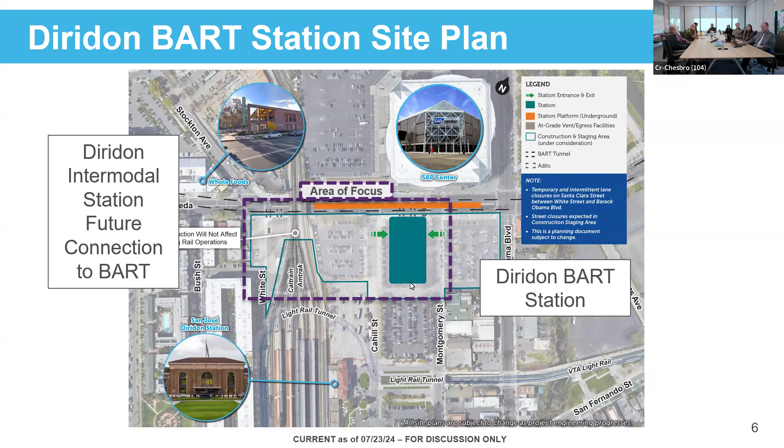At each station, I mean, at each area. So we'll talk about the 3 station configuration options, and then we'll talk about the 3 intermodal connection options. So just to keep that in mind, we'll start with the station configuration. We'll talk about the 3 different options we have there, which is underground, with the expanded footprint, and then the above ground. And then we'll talk about the connection to the future intermodal station, which will be the high-speed rail

connection. That will have the baseline, which is above ground, and then we'll talk about the connection to the primary entrance, and then a direct connection to the BART tunnel. So I just want to let you guys know those are the 6 things we'll talk about today. Considering that's what we talked about last time, are you trying to get different feedback from us? What's the goal of this?

So we do want to make sure that what we presented was understood. And I think we had some comments and questions from the last meeting that I want to make sure I address today. And if I don't address those, then I want to make sure that we have an open forum for you guys to ask questions and we give you more feedback. So we also have another poll that was sent out. It was sent out as a link. So we're not going to do the online version using your phone today.

Polls are useless. And polls might be useless, but we did send a link out. You guys can provide some open feedback and type in some things that you'd like to see. And so those are the things that we wanted to make available to the CWG members. There's an age bias in polls. We will definitely take whatever's verbally explained to us as well today and definitely note that.

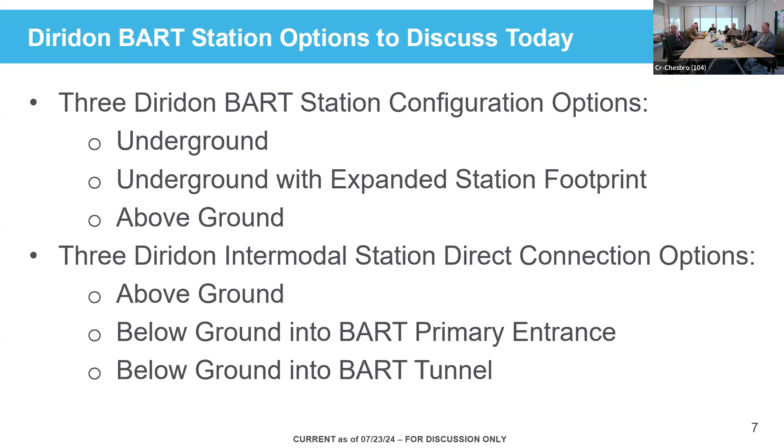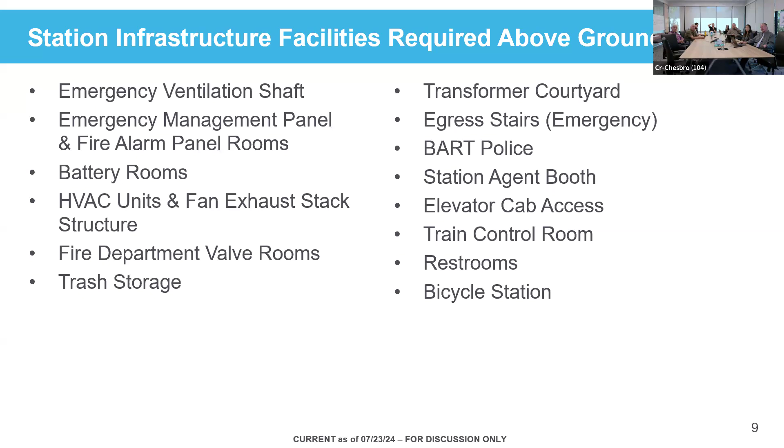Okay, sounds good. So we'll kind of go through this. I'll give you guys the presentation, and then we'll open it up for questions for anybody who might have some. And again, this is an open forum for everybody. So these are the things we talked about in terms of things that are driving some of these decisions. These are some of the things that we need to keep above grade. I just wanted to reiterate that on these options for the stations, there's certain things that do have to be above and some things we can definitely put in a basement level.

So these are the 3 options that we have. And again, we went into these graphics last time, and I want to bring up some new graphics that show a lot more detail for each of the 3 configurations. I do want to go over them quickly though. The underground scenario, which is on the left, puts about 50% of all the station infrastructure below grade. That's in the white hatch. And then we have 2 floors above. The one in the middle expands the overall station footprint and allows for a little more ground floor retail. That's the main difference between the one on the left and the one in the middle.

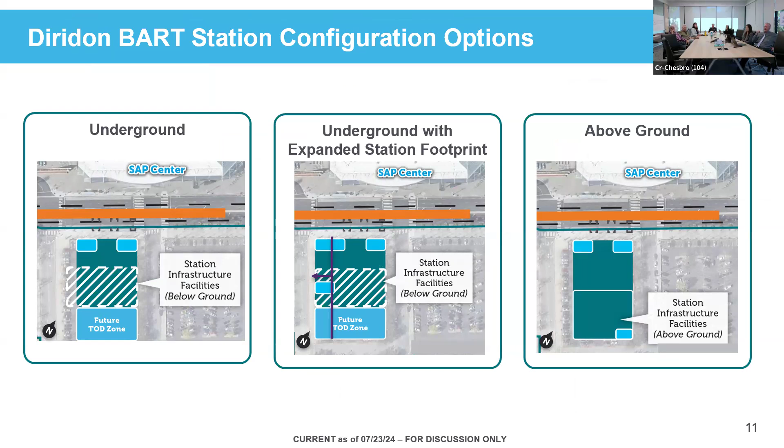And then the one on the right is just the above ground. Everything's at 1 level at grade. And then there might be a little bit more on a 2nd level above grade, but it's all essentially VTA and BART infrastructure in that area. And there's really no basement level. A quick question about everything at grade. The station infrastructure facilities, how high is that? That'd be about 20 feet, 20 to 30 feet. Like I say, I'll show you some axons which show a 3D view of those, so I can show you what those look like. Okay, thank you. Sure.

So this shows us a little more detail. This is the underground scenario. It shows some of the room layouts that we have in there. It shows the escalators and elevators and stairs that are inside of that station drum. The station drum is shown in purple. We have 2 entrances, one on the west side, one on the east side. And the main configuration change here that's different from the expanded footprint is we've got those 2 green strips along the side of the station.

And that's about a 25-foot offset from the back of the sidewalk to the frontage of the station. And that'll allow for some activation, some open space. We can put some things in there like pedestrian friendly elements. And it also allows for queuing of people entering the station after events or during crush, during peak entrance and exiting of the station area itself. So if we've got a lot of people coming in at nighttime, or a lot of people leaving the station, they can exit out and not dump directly into the sidewalk.

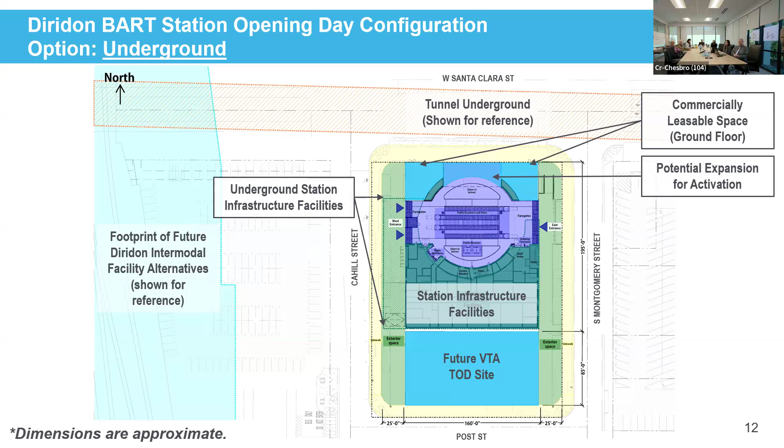We don't have a lot of parking around this station itself. And essentially, we all know this whole development around this area will kind of change how Montgomery and Cahill look. But this is essentially the day one situation. This allows for a fairly large future VTA TOD site. VTA will develop that in conjunction with a future partner, a future developer, and that will show you in the next slide.

It could be anywhere between a low rise to mid rise or a high rise building, really depending on usage and how that works. The ground floor would essentially be activated retail space or commercially leasable space around that whole perimeter. And then we also have the frontage on Santa Clara, which allows for some retail or leasable space for various vendors. So this is the kind of configuration for the underground scenario.

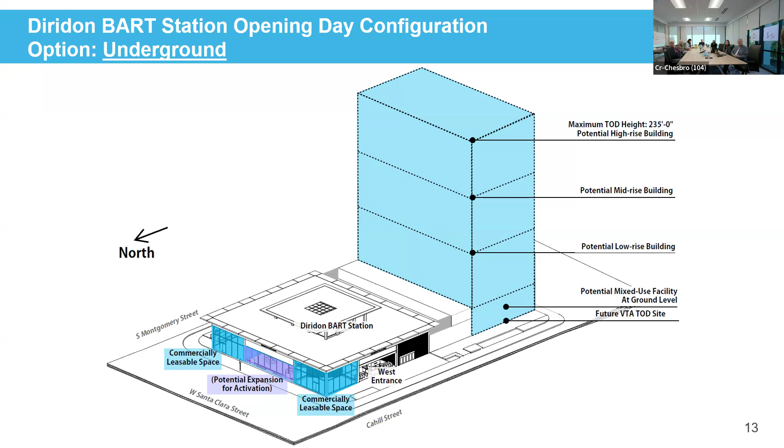We've got a lot of infrastructure below grade, and then we've got the needed infrastructure above grade behind that station, and that's shown kind of in white there. This is a cross section of the area that I'm talking about, where you've got a basement 1 level that's shown in the white hatch there, and then you've got the area above. So we've got this large station drum that goes down to the tunnel. That's essentially the same in all the scenarios.

So if the Girl Scouts or the Scouts want to sell popcorn or cookies, they have space to set up outside. Yeah, so that's kind of what these green strips do on all scenarios. We always have a green strip on Montgomery Street. We have some grading issues we've got to deal with over here. But at Cahill, this is really the change here. We've got kind of an open space. You could have vendors. You could do a lot of little different things out here.

Can I ask you a really dumb question? Horizontally, yes, I think that's horizontally. When you come down, where is the line that a passenger would come to and then enter the round circle? So right here. If you come down an elevator or an escalator, where does it stop? So if you entered the station, this is street level, right at the top of here. Then you'd come down one set of escalators down to a landing, and then a second set of escalators down to this landing. Then you'd walk over here. So there's a big box underneath which has all kinds of stuff in it. Oh yeah, we've got a lot of other stuff down in here too. That thing's about 100 feet deep.

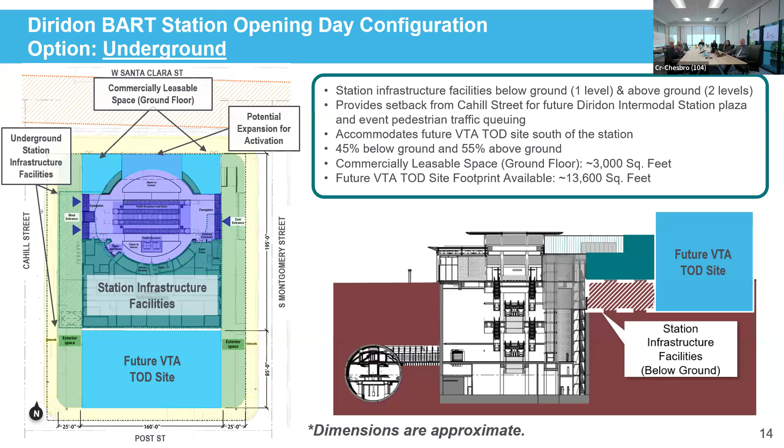So I'll just keep going to the next one, and then we can come back and talk about any of these options. Could I put something on the record? Sure. You and I talked about it, but in other high-speed rail systems around the world, you would use the space on top of that building for a high-rise building. That would be commercial, and the revenue from it would accrue to the transit agency. In fact, the Japanese Shinkansen gets 40% of its revenue from the land leases. That makes it a real moneymaker. I don't know why we don't use that space and plan to use that space for TOD.

Right now, based on the fact that you have to design that structure to BART standards, it doesn't make commercial sense based on the analysis that's been done in the market today. That's part of the VTA real estate analysis. It doesn't make sense that it works in Japan, it works in China, it works all across Europe, but it won't work in the United States. We're really losing an opportunity for 40% of the revenue that could be coming in to the system, and that's free revenue, forever. You still have to have the initial investment to build it, and right now the initial investment isn't there. But what this option does have is a pretty significant mid to high rise building right adjacent to the station.

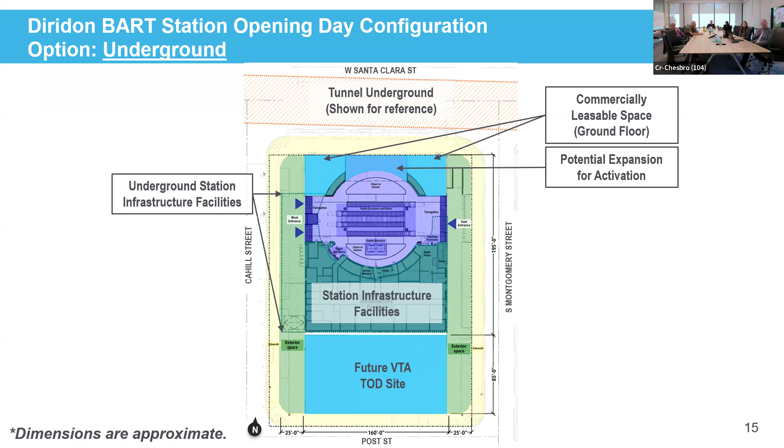I do see Charlie has his hand raised and John has his hand raised too. I'd like to just go through the next two options real quick, and then we'll answer all questions on all the options if that's okay. Just let me get through these, and maybe by the time I get through them, some of the questions will be answered.

Again, this is the expanded footprint, very similar to the previous one, except we do lose that exterior space on the left side of Cahill. We create a larger footprint of station building, and we add a little bit more commercial leasable space on the ground floor. That's the middle one back there.

That's correct. What's the margin, the width of the sidewalks? I think we're at 15 feet of sidewalk, if I'm not mistaken. So still not a tiny sidewalk, but it definitely inhibits a little bit of that queuing space and some of the things that we really miss.

This one, then we start talking about Cahill Street and how that becomes operational after the program is in place. Again, we'll have to work through that with the city of San Jose, our partners. But this does expand the actual station footprint a little bit.

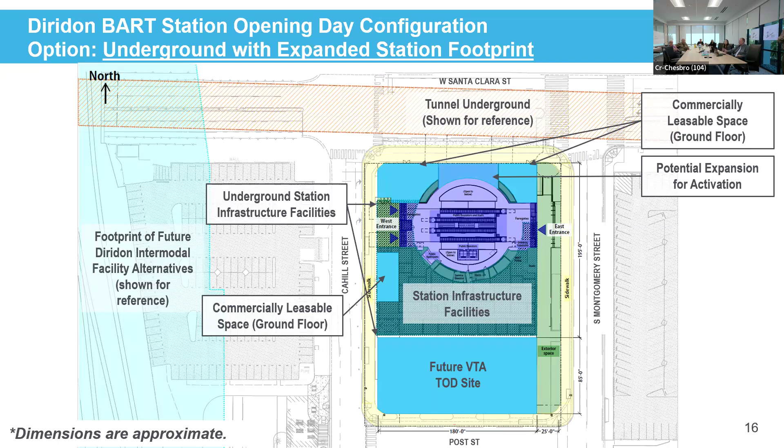The last option, and this is the cross section of that. The last option we have is the above grade scenario. Again, this essentially builds out the whole facility with VTA and BART infrastructure.

We do have an integrated bike station and locker. We do have some commercial leasable space in the corner. I do want to note that when we had the other options, we don't show a bike locker here, a bike storage locker within the station, but we will have a significant number of bike lockers out here on this site. And then when we develop this TOD site, we will integrate a bike locker storage facility there. So there definitely will be a lot of bike parking. We have to have that as part of our commitments to the program. So I do want to reiterate that because that is a difference.

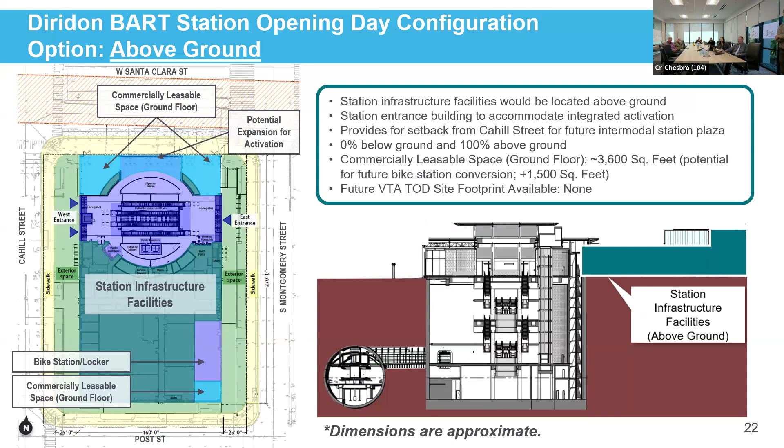So those are the three options. Now we can open it up to questions before we get into the next phase of the program. Maybe, Charlie, I think Charlie raised his hand first.

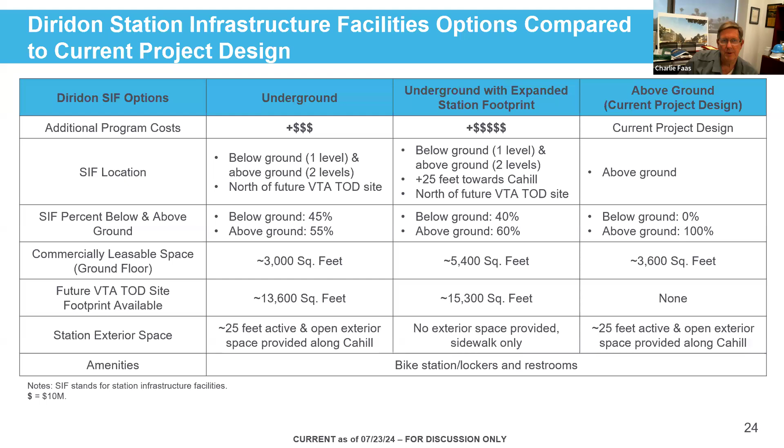Thanks, guys. So maybe a crazy question, but I'm going to try to bring Rod and the rest of us together on my thought. If you go back to option 3, I like option 3. A lot of what Rod was saying is important, that we can't build for today, we got to build for the future, and we only get one bite at this thing. If you build a one-story building, we're sacrificing going up.

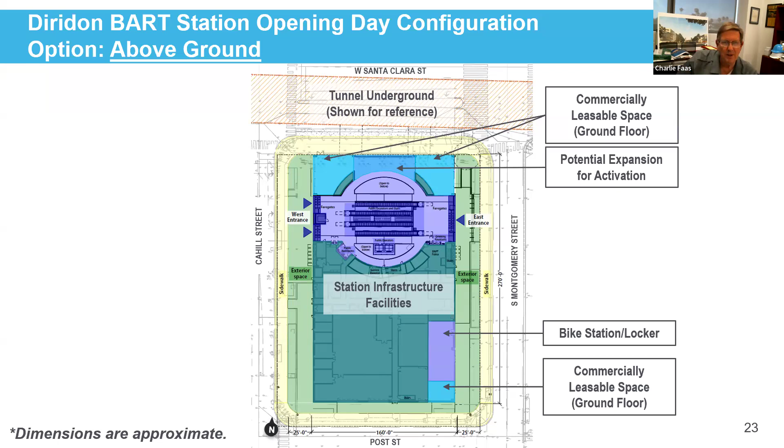Is there a way you take option 3, and instead of putting all that equipment underground, which gets pretty expensive cramming it into that space, can you put it on the second floor of this structure and use that underground space as a bunker for lockers and bike storage and stuff like that? Think of this differently. This bike storage on the side is great commercial type of space, and that's why we have the commercially leasable space on that area facing Montgomery.

I think we looked at a lot of different options here, and if we start to stack things up taller, then you have maintenance issues as well. It's almost the same maintenance issues as a below-grade scenario. A lot of these pieces of equipment are heavy, and to maintain them you've got to have the ability to go in and out. Once you start putting elevators in, whether you go below or above, you're still kind of having that same infrastructure. So having it fully above grade allows for the most economical and maintenance-free, or most maintainable space. Once you stack them, we have a little bit more O&M costs, and a little bit more capital infrastructure costs.

I hope I answered your question, Charlie. Yeah, and kind of, but I'm with Rod on this thing. I look at San Jose State's campus, and the one thing I wish I got here 10 years earlier for - we have 3 massive 2-story buildings on our campus that take up a quarter of my whole real estate.

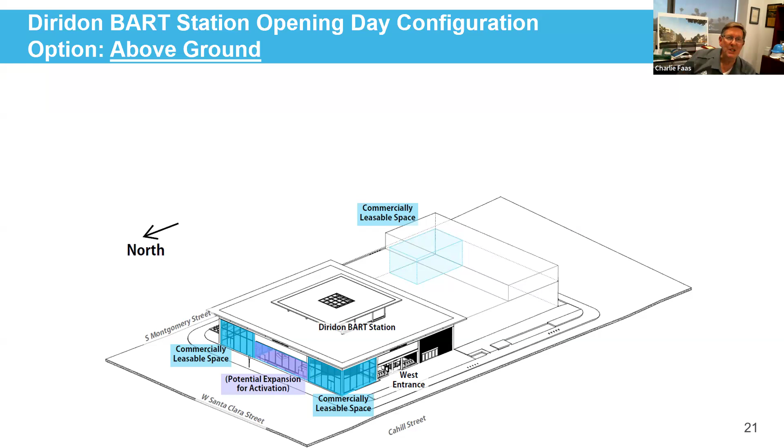Instead of having it just at that level, have 25 stories on it. Well, maybe not quite that high, but yeah, it's got to go up. We could debate how much is needed, and that's where I think the analysis falls flat right now - massively today we have too much square footage in San Jose, and no one needs more office square footage in downtown. So that's the problem, and you have to put a footprint in that maybe you can build on top of in the future. And that's really what this is - that's option 1 and option 2.

Right, I mean that's really what we've done - we've condensed as much as we can into a basement level and an at-grade level, including, and again, this does have a second floor here as well. This is a fairly grand entrance, a fairly large, high roof facility. It'll definitely be as tall as the historic station.

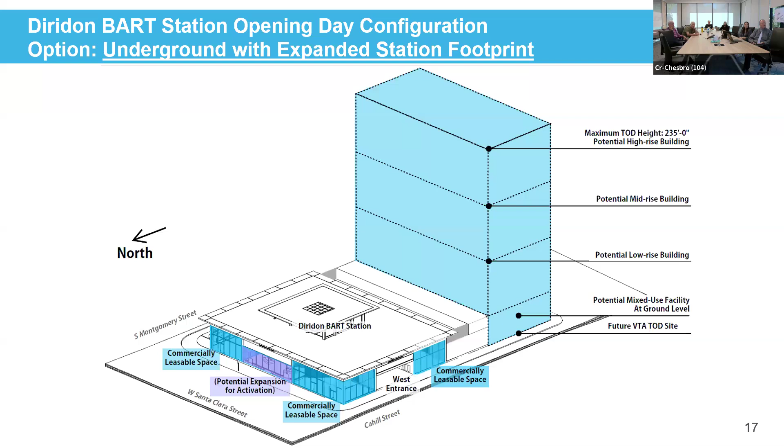For future high-speed rail, you build it in and it's dirt cheap compared to having to retrofit later. It just seems like somehow if we could design in some kind of foundation and give a developer a heads up, we wouldn't need to at this point. The developer can build a foundation here that's uninhibited by our infrastructure. This whole area underneath, in the plan view, is essentially wide open for him to develop a pile foundation system here, no problem, just outside of the big hole.

So the future TOD site's way over here, right? Correct, so his deep pile foundation system is going to go in here. We're not going to put anything over this. Build in something here and we've got it open so that we can go 20 stories above it.

We just do not have the ability to fund that currently right now. And so the ability to develop on top of these stations is not something that VTA is able to do at this point in time. And that's because no developer will come in and help you with the cost.

That's correct. Have you approached Google again? Yeah, we've been in contact with Google for the last four years, talking about how they're going to build stuff, how we're going to build stuff. We've compromised on different things - we actually moved one of the major pieces of our emergency egress shafts over here.

You can see it kind of circular here. This used to be on the adjacent block. We've moved that over here to save the program schedule. It cost us a little bit more money, but we got it out of the way between Montgomery and Barack Obama. So those are some of the things we've already done to try to mitigate for Google. And again, the design criteria for a BART facility is extremely, extremely high.

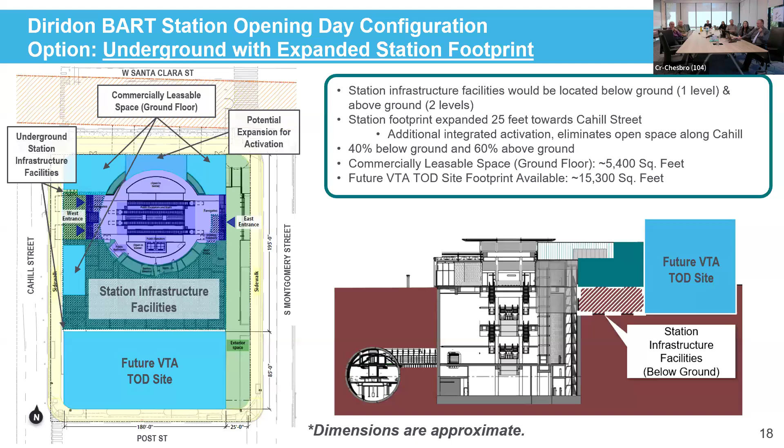Okay, so now we've got the 3 different scenarios for the intermodal station. And I just want to orient us. This is the BART station here in orange. We've got the SAP Center across the street. And then this is the current design of the intermodal facility layout. We've had several task force meetings with the group who's doing this, and the city and the Diridon business case team, and we've gotten a lot of feedback. We've shared a lot of technical data between them and came up with our 3 options that we'll talk about today.

We've got the above grade scenario, which is an at-grade walkable route. We've got a below grade scenario, which ties into the primary head house drum itself. And then the third one is a direct connection to the BART tunnel.

And again, for the folks who are concerned about whether or not you could still walk around up above, all 3 scenarios, obviously the first one, but all 3 you can definitely walk from the future connection across this new plaza and into the head house. But the third option gives us a more direct route through a tunnel.

And this is the at-grade scenario. This is a cross section that shows the future high-speed rail tracks here. This is essentially where the... let's see, can you guys see my pointer? No, I need some help with the pointer over here. So yeah, this is the area that the current Caltrain alignment is, right in this area. Here's where the pedestrians would be able to get out of that station, come into this station, come down those escalators, and then enter directly. This is obviously a no cost scenario for the BSV program.

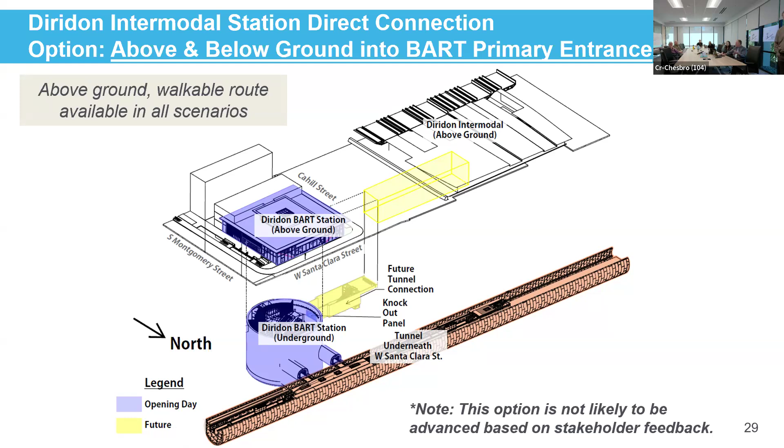The amount of time savings associated with this really does not provide much benefit for passengers, whether they're above grade or below grade. The only real benefit here would be to have people able to walk in a tunnel instead of walking outside. So I do want to note that this is likely not to be advanced, but I did want to show you because we did show it last week, and I wanted to reiterate a little bit more detail of what we were talking about.

The third option is a direct tunnel connection. What this does is it allows for a pathway from the future intermodal station to a future tunnel to be built by the intermodal team. And then we would extend our platform concourse about 125 feet or so, which would allow for people to come down this tunnel, escalator, elevator scenario, tie directly into the tunnel, and then access the BART trains in that fashion.

So this does cost our program a little bit of money. We would put some steel liner rings in this precast tunnel liner segment, so you can tap into that in the future. We would provide a little bit more concrete and a little bit more mezzanine level and extend that concourse to tie in. The BART fare gates would be in the yellow area somewhere. That would be coordinated with the intermodal team as well as with BART. We would provide conduits and infrastructure for that future tie-in, so those fare gates could communicate back. We'd put in the communications infrastructure, et cetera, and work through that.

So also, you could still walk out of the station, walk across this future plaza, and then walk into the head house if you wanted to go down that way too. So this doesn't mandate you have to go in the station this way. It just provides a more direct connection for those who might want to jump on a BART train immediately.

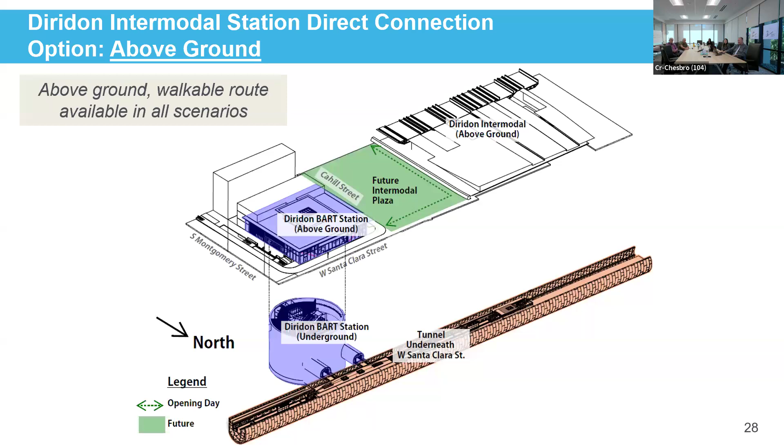So those are the three options that we've got here. Again, the direct connection does cost this program some money right now to put this infrastructure in. So we just need to make sure that that's going to be something that our community working group is definitely interested in seeing. I know we've had a lot of positive feedback on it in the past. Now we just got to confirm that with the team and then find some funds for it with our partners.

So you said the time difference is a minute. I believe it turned out to be right around a minute and 20 seconds or something. But what's the actual time? I think it's 4 minutes, if I'm not mistaken. Versus 5? Versus three and some change. I can get those numbers to you. I'm bringing it up by memory right now. Just kind of ballpark. Yeah.

And that really goes from like the middle of a platform up to the middle of the other platform. And there's different software programs that are used to model that pedestrian routing. And if I'm not mistaken, I thought it was 4 minutes and 27 seconds or something like that. But I can get those numbers to the team. It'll make all the difference in your community. Yeah, as we said, there's going to be tens and hundreds of thousands of people a day. You save a minute, that's a lot of time. It adds up.

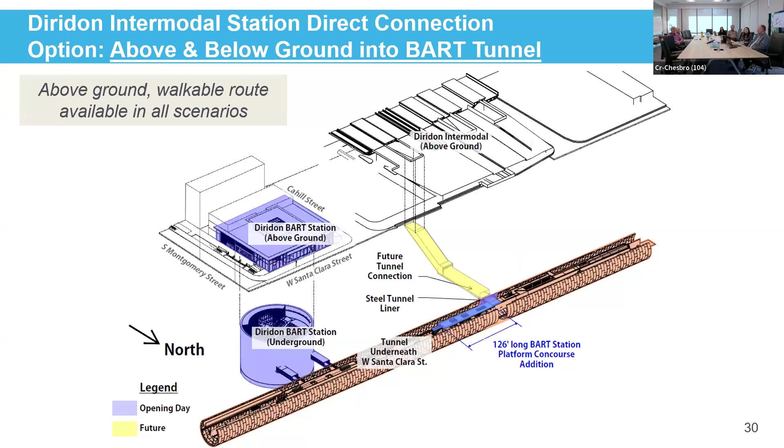This is approximately a $40 million increase to our job just to do this platform concourse addition, plus put in the steel rings, plus get everything ready for a future connection. So this is a pretty significant investment for this program to do this future connection. Well, long term, I think it's essential. It's just fabulous. I mean, you've got to do it, as far as I'm concerned. Good job. Well, it's our job to get the 40 million. So we've got to get the 40 million, right? Exactly. All right.

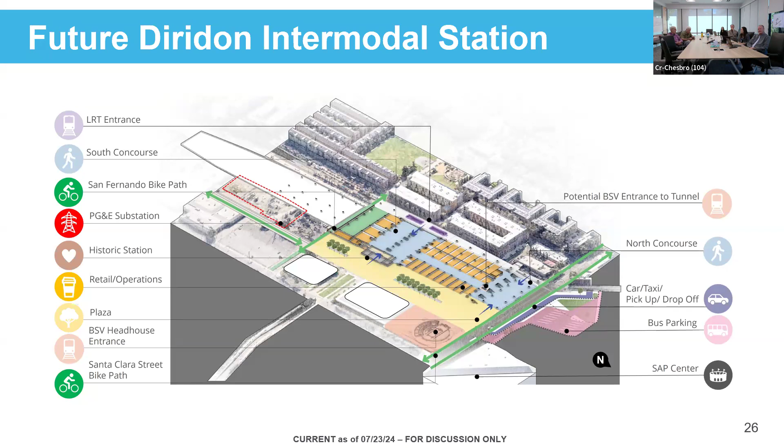I'm on the Diridon Station JV, and we haven't had this presentation yet. Okay. I think they're gearing up. I think one of these slides actually came from them, this one here. So I don't know if you've seen this one yet, but you'll probably see it soon. What's a little confusing about that is you're showing these little yellow squares. That's the level under the tracks. That's right. And so you don't see the tracks there and it's hard to orient yourself unless you're aware of that. Got it. But it shows a lot of commercial opportunities. Yeah, absolutely.

Okay, so next step. In Japan, that area would have pilings on top, and on top of the tracks would be 50 stories of commercial space. Even more. In an earthquake zone. Yeah, in an earthquake zone. I will say we are building a parking garage on top of the BART tracks at the Santa Clara station. So we are utilizing some space over there, just to let everybody know there's some efficiency happening. If we can put cars up there, why can't we put people up there? We're short on housing in the valley.

So again, option 1 and option 2 provide the most opportunity for those future mixed use. So we'll definitely take that. I know Carolyn Gonot was really committed to TOD, and I think she's pushing Jesse Solis and others in that direction. So again, if those are the selections of the committee, please provide that feedback for the CWG. If you think that option 1 and option 2 are the best scenarios, we'll move forward with it.

This option, what do you call this option? What number? You can call this direct tunnel connection. Okay, direct tunnel connection. And is that option 1? I think we've got it listed third, so you can say option 3. Option 3 for Rod. We tried to eliminate numbers on options and call them things like underground, underground with expanded, and above ground. But anyway, we do want to note that we will have another CWG meeting in 19 days, so we'll present some more elements to what we've talked about.